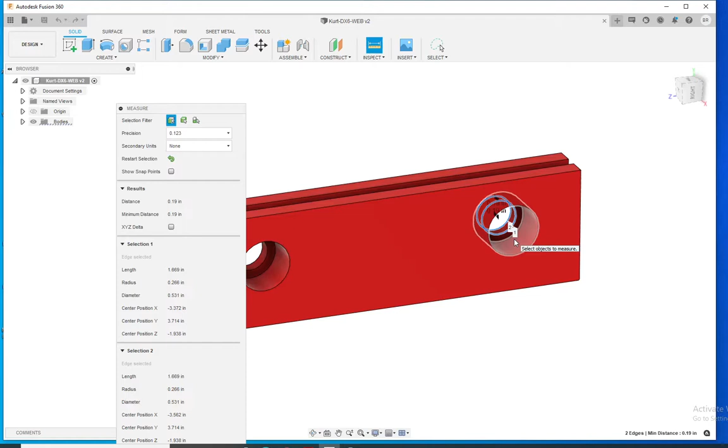So if we get the distance between them, it is 3.875. And we'll get this counterbore diameter, which is going to be 0.781. And we'll do the through hole diameter, which is 0.531. And then we'll get this thickness. We'll use that just in case you want to use the screws that came with the vise, or you can update this parameter if you want different length screws or you got a thicker soft jaw.

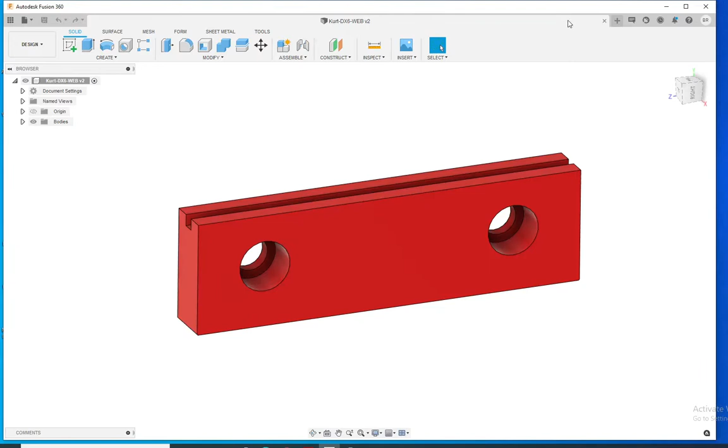And then we also need the distance here between the bottom, and that's 0.55. And notice that that is different than this dimension here. So there is essentially a top and a bottom, and I'll give you a little note on that here in a second. So let's create a new file. First thing we'll do is go create our parameters.

So we need length, and we'll start with 6. Height is 2. We'll call it depth is 1. Now we're going to make this obviously from 1x2 stock, so we're going to want to essentially mill finished edges on that. So we will need a stock offset. So let's just say it's 10 thou.

And we need our counterbore diameter, which was 0.781. Our through hole diameter was 0.531. And then we'll call it our through thickness, was 0.19. That gives us the info on the counterbore holes, and now we just need our hole locations.

So we'll call it hole offset X, 3.875, and then hole offset Y was that 0.55 plus the counterbore diameter divided by 2, or its radius. And that should be what we need to start our sketch.

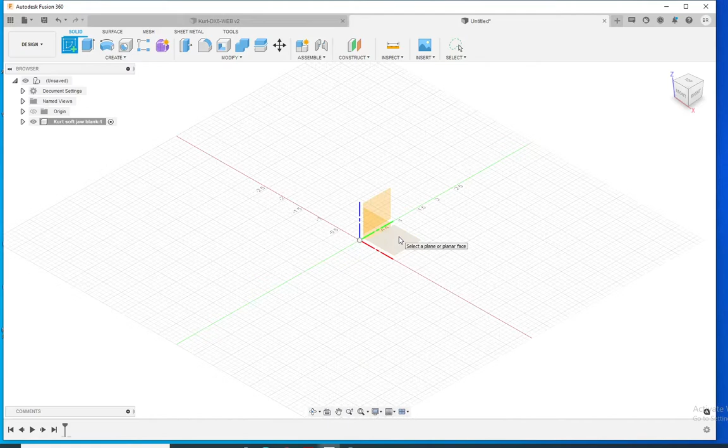So we'll create our sketch, and all we really need is 3 points. So this will be the corner of our soft jaw. This is hole number 1, hole number 2. You could technically mirror these things. I think it's just faster and easier to just do it in the sketch.

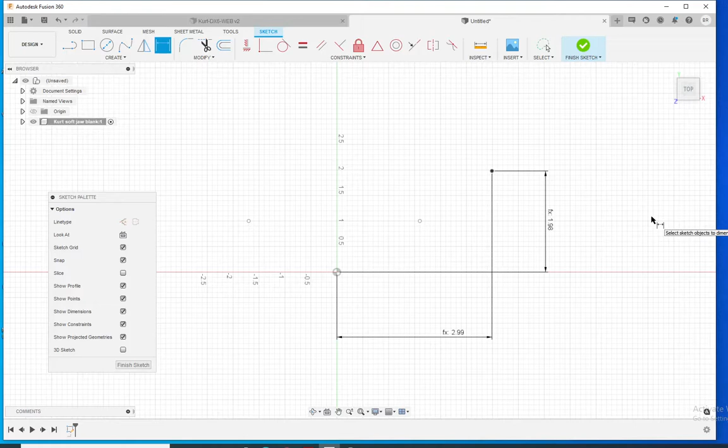And then what we want to do is dimension them. So this length is going to be the length divided by 2 minus the stock offset. So that'll give us 10 thou. Now for the height, since we're not doing half of it, we want height minus stock offset times 2. Again, that'll give you the 10 thou on each side. So we want a rectangle, and let's see.

Let's just go ahead and do this. This dimension is going to be this times 2, and the height will be this dimension. Okay, and then we're going to dimension our hole locations to be hole offset x divided by 2, hole offset y, and then we'll do a horizontal constraint here, and this dimension will just equal this dimension. And that's our sketch.

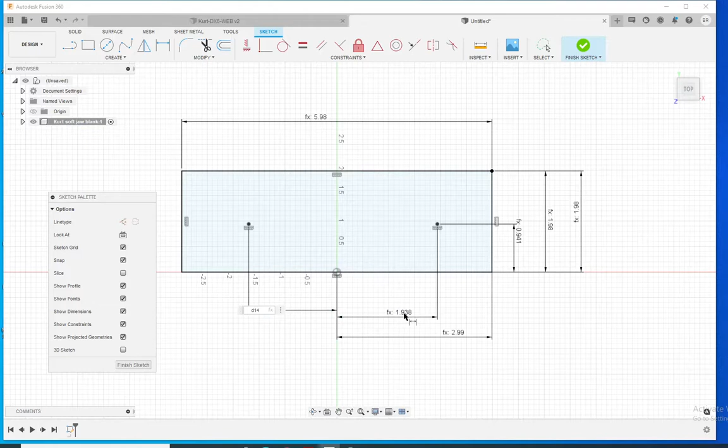Now, since I want to use these points for the hole command later, we're going to end up pulling in a negative direction. So we're going to do negative depth, and then we want to do plus stock offset times 2. And let's just verify these. So if it's a 1-inch stock, we've got 20 thou, 10 thou on each side. The length would be overall length minus stock offset times 2, and then stock offset, so we're good to go.

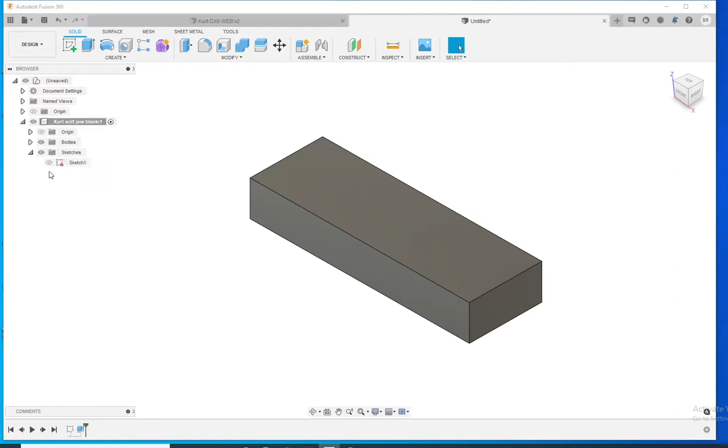Now for the holes, we want to just show the sketch again, hit H for the hole command, pick our 2 holes, and then here is the depth minus stock offset times 2. This will be the counterbore diameter.

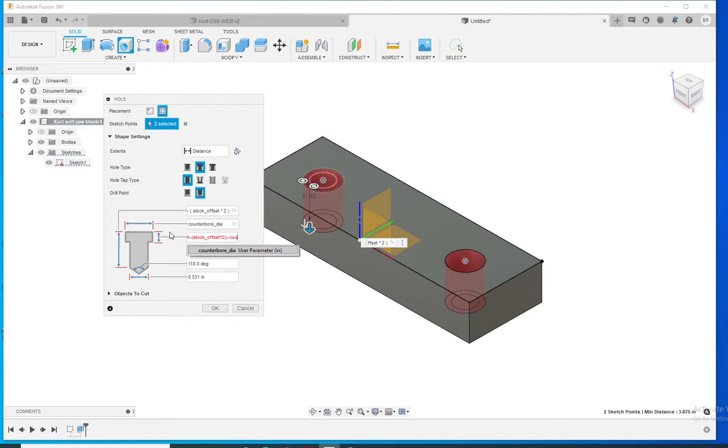This will be the depth minus stock offset times 2, but then we're also going to subtract the through hole thickness. And I didn't want to do that. We're not done just yet. What's the through hole diameter? And let's see, should be good.

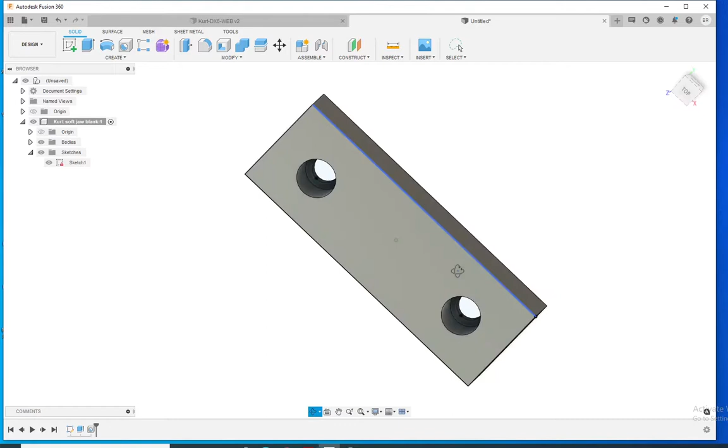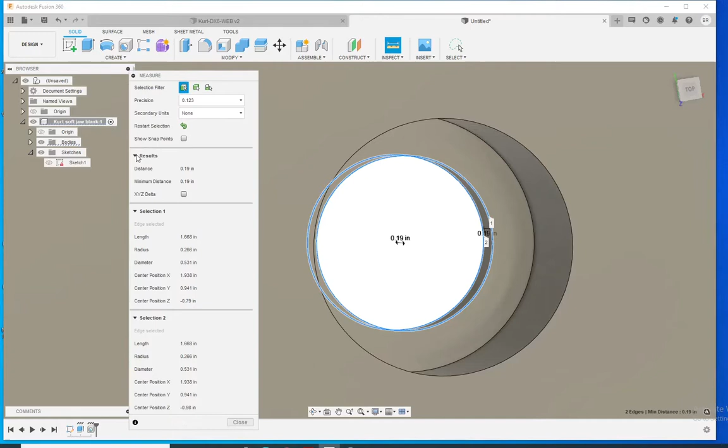And let's just do a quick spot check. So our diameter is 0.781. Through hole diameter is 0.531. Let's hide our sketch. And then this surface to that surface is 0.19. So everything is how we want it, and that is our soft jaw blank.

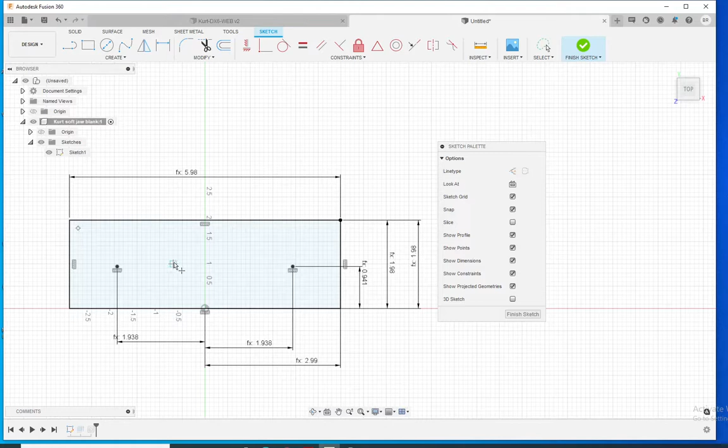Let me go back here real quick. So another thing I like to do is, because again we talked about those, the distance here to here is not the same, so there is technically a top. Just put a point up there, and we can just dimension it from this corner here, and just put it like 200 thousandths, and from there as well 200 thousandths.

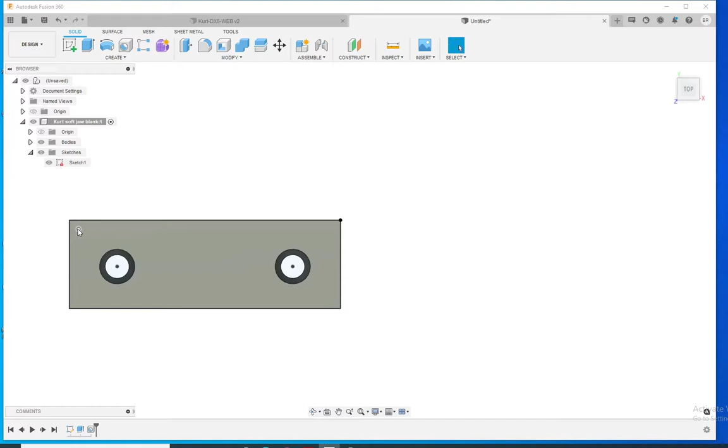We turn it on, we have a sketch there. I just use that with a spotting drill, go in like 100 thou, just so I have a little dot. Saves me 30 seconds if I put it in, you know, wrong, upside down, whatnot. So here we have our solid model for our soft jaw.

And the nice thing is, if you want to, for instance, let's say we have an 8-inch jaw. Now we should have 0.798 with our stock thickness, and just for sanity, we'll check the distance, 1622 and 1622.

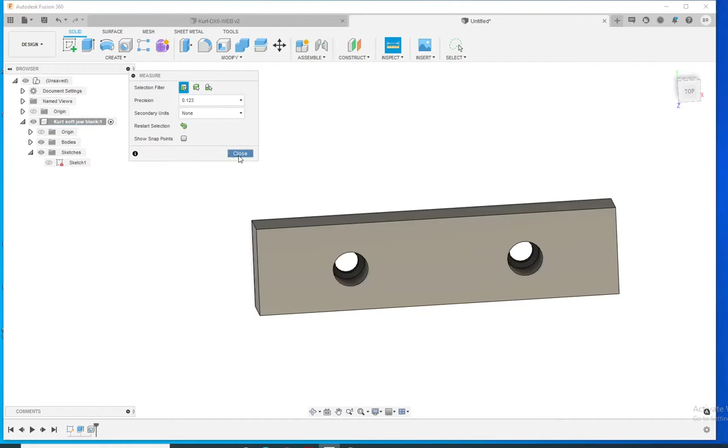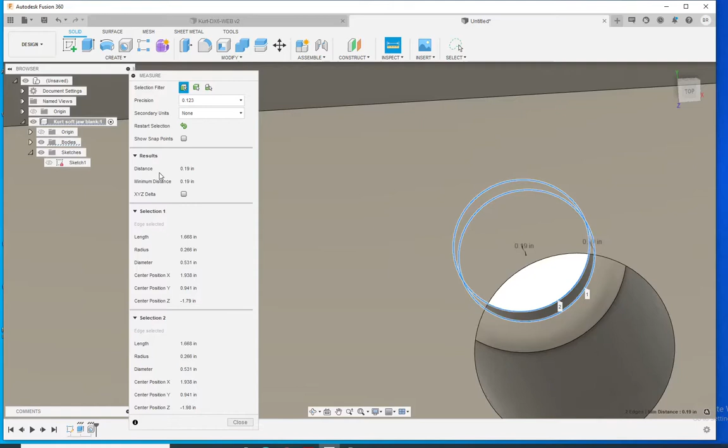And I actually need to make tomorrow 2x2 soft jaws, so 2x2x6. So we'll keep the 2, and then we'll make the depth 2, and that should just increase this. And we've got our 2x2 with the correct stock. And then if we look at these two surfaces, we've still got that 0.19, which allows us to use the screws that came with the Kurt vise.

So just simple, 5 minutes or however long that took to make these blanks, and then without having to redraw or create different models in one file, you just come in and change your parameters. You do that, it would update itself in the CAM as well. So if I had some toolpaths in here, I would just regenerate when I change the parameters, and you're good to go. So I hope that was helpful. Just a real quick little demo to highlight the power and the advantages of Fusion's parametric modeling.